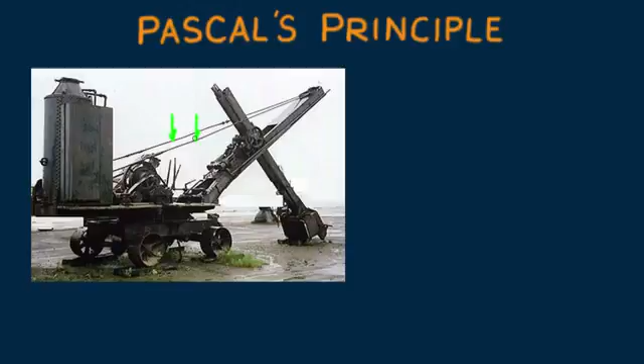My parents grew up with steam shovels, excavators that dug sewers, cleared land, and were used in many forms of construction. Steam-powered excavators soon gave way to diesel-powered ones. Mechanical things at the time were typified by levers, gears, and steel cables. All that has changed, for today it's hydraulics, with pistons replacing gears and levers.

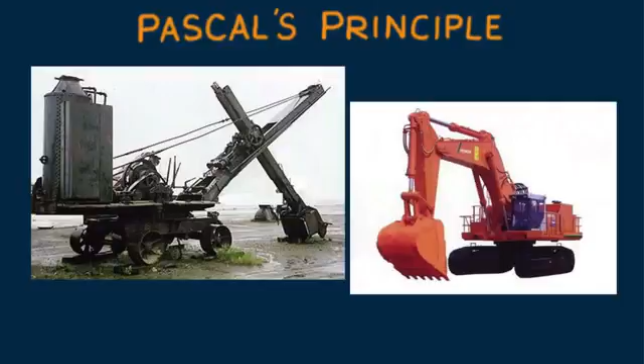Hydraulics is the study of fluids under pressure, which nicely employs Pascal's principle, the underbelly of today's machines, from playful gadgets to skyscraper cranes. So what is Pascal's principle? It's simply this. A change of pressure at any point in an enclosed fluid at rest is transmitted undiminished to all points in the fluid.

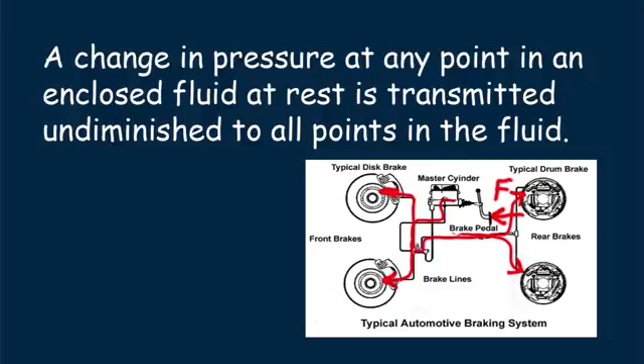You know you can exert a force on a faraway object if you poke it with a long enough stick. What Pascal tells us is that you can do the same with fluid in a pipe. Every time you step on the brakes of a car, for example, you're employing Pascal's principle. The force you apply to your brakes produces pressure in a fluid that is transmitted to the brake drums in the car's wheels. Fill a U-tube with water and place pistons at each end.

Apply pressure to the left piston and it will be transmitted throughout the liquid and against the bottom of the right piston. The pistons are simply plugs that can slide freely but snugly inside the tube. The pressure that the left piston exerts on the water will be exactly equal to the pressure the water exerts against the right piston. It's easy to imagine if you push down on the left piston, the right piston goes up. This is nothing to write home about, no big deal.

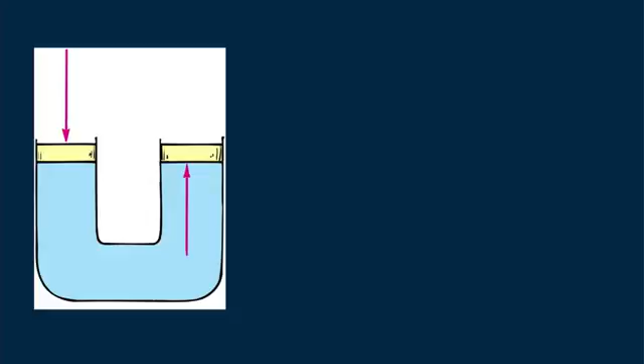But suppose you make the tube on the right side wider and use a piston of larger area. The result can be impressive. If the piston on the right has 50 times the area of the piston on the left, you can multiply your input force by 50. That's right, with no levers, pulleys, or gears.

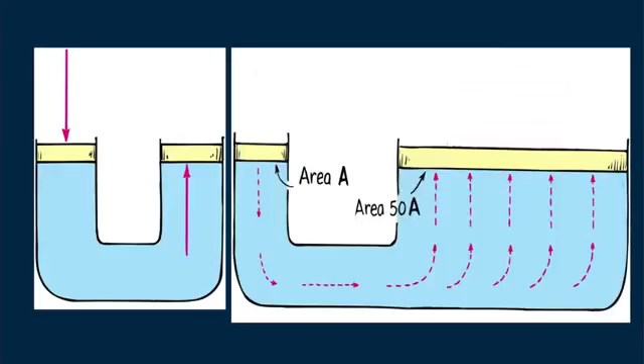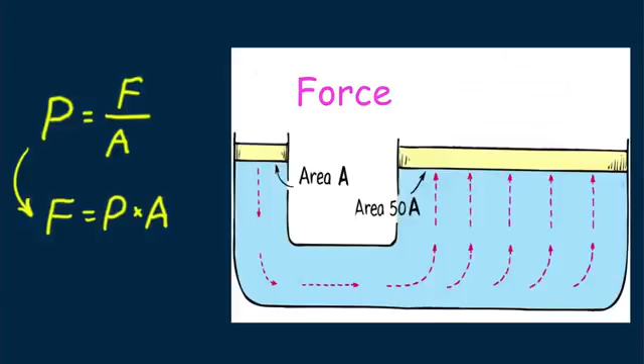Here's where the distinction between force and pressure comes in. Recall that pressure is force per area. Turn this around and you get force equals pressure times area. So whatever pressure you impart to the left piston will be imparted to the right piston. That's not the impressive part. What is impressive is force. Whatever force you apply to the left piston, 50 times more force can be exerted by the right piston. This arrangement of pistons can multiply force.

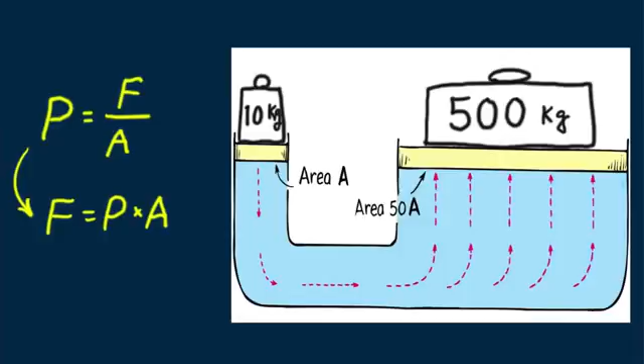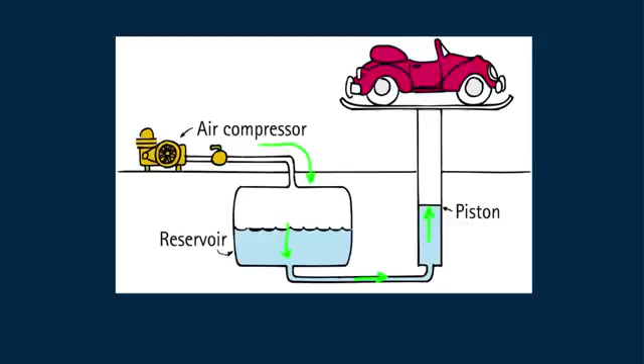Pressure is force over area. The force would be the weight of the car and the rack it sits on. A reasonable figure for this is 3,000 pounds. A reasonable area for the piston is 200 square inches. So the pressure, 3,000 pounds over 200 square inches, is 15 pounds per square inch. 15 psi, about the same as atmospheric pressure.

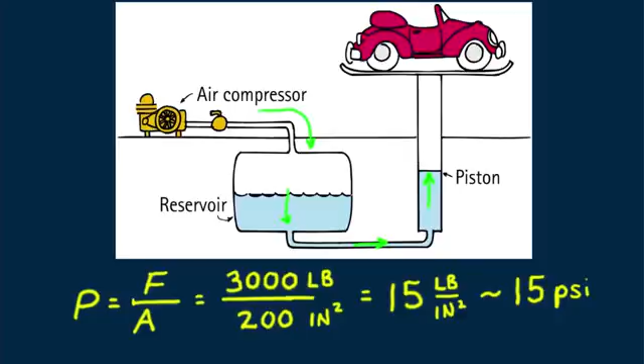So an additional 1 atmosphere of pressure, easily supplied by the pump, can lift the car. Said another way, a gauge pressure of 1 atmosphere can lift the car. Gauge pressure is over and above atmospheric pressure. When a tire is flat, for example, its gauge pressure is 0, but there's still atmospheric pressure in it. Gauge pressure, what gauges read, is the pressure in addition to the ever-present atmospheric pressure.

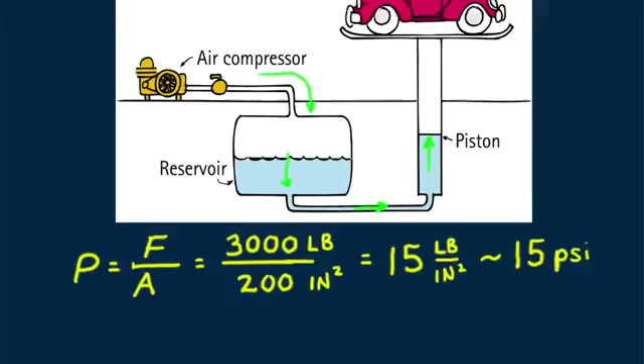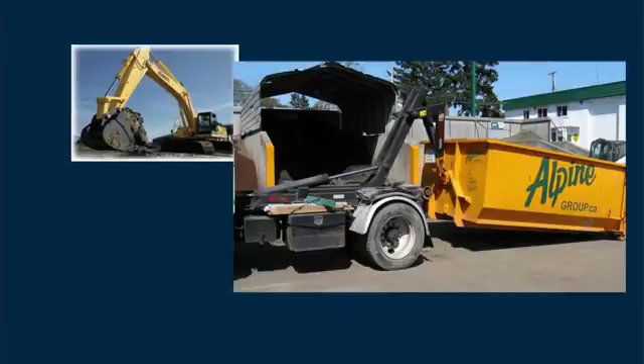And here's an interesting situation where piston sizes are reversed. Do you think the fellow will be successful in exerting enough force on his piston to lift the 10-kilogram mass on the other end? Do you know why? I don't think so.

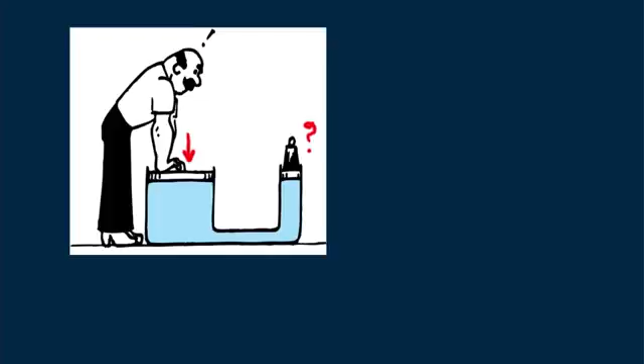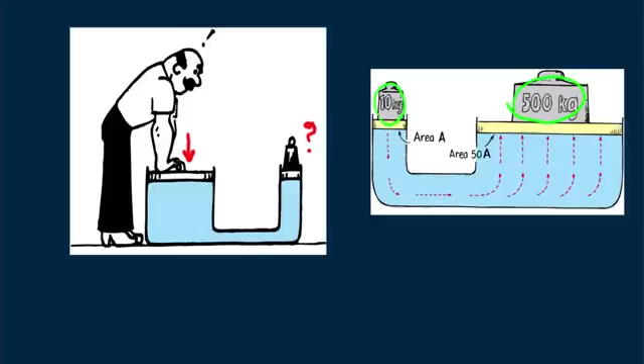I want to conclude with this information. Pascal's principle can multiply or diminish forces, but no set of tubes and pistons can multiply energy. So here's my concluding question. As we've seen, with a proper piston arrangement, you can certainly multiply input force. Why won't this piston arrangement similarly multiply energy? What's your explanation? Until next time, good energy.